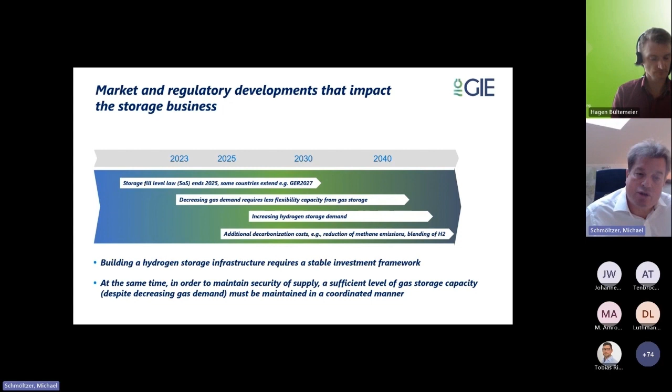So those are some developments we see in the coming years that also influence the question how to realize a hydrogen infrastructure, what is the investment framework, and that's a very difficult situation at the moment because the legal framework is not there, and the investments have to be taken now in the next years so that the demand for hydrogen storage can be covered.

When we look on the European, and I'm sure that we will see that also more from the German perspective, but when we look on the underground storage capacities on the European level, we have more than 1,000 terawatt hours storage capacity, working gas volume in depleted fields, aquifers, and salt caverns. So that are the storage capacities, which is around 25% of the gas demand in Europe.

When we look on the share of the salt caverns, so you see here on the left side a number of around 175 terawatt hours working gas volumes in salt caverns, which is a huge figure. And I think what is very interesting in context of Germany is that 80% of these European cavern capacities are located in Germany, which is a very important aspect also in context of repurposing existing sites. So Germany has a share of 80% of the European salt cavern capacities at the moment.

And because of the different energy content, different pressure situation, if you would convert all these existing cavern capacities, you would end up with a working gas volume for hydrogen of around 50 terawatt hours, because of the lower energy content and the different pressure situation. If we only look on the PCI list of planned cavern projects, we currently see till 2030 around 30 terawatt hours.

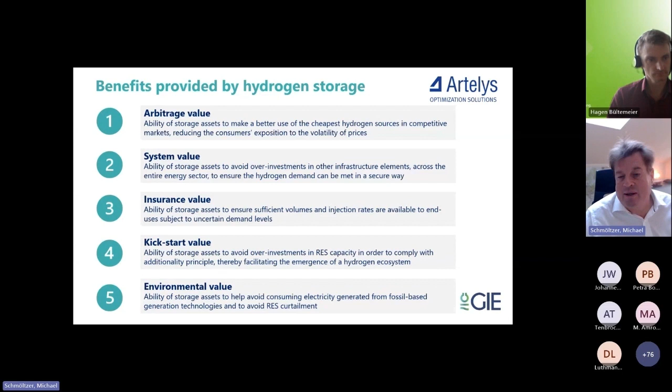a supply disruption. But what is quite new in the values for hydrogen storage is the kickstart value and the environmental value. So the kickstart value, hydrogen storages could also avoid overinvestments in the renewable electricity capacities, and the environmental value, we could avoid electricity generated from gas or fossil-based generation, and provide the flexibility that is needed in electrolyzers for producing green hydrogen.

And I think that are two additional values hydrogen storage are contributing to the value chain. If you are interested in all the activities and pilot projects on the European level, GIE, together with other organizations, ENTSOG has provided a hydrogen infrastructure map. You see here also the link where you can access the different projects. So it's on transmission, distribution, storage, where you can see all the pilot projects.

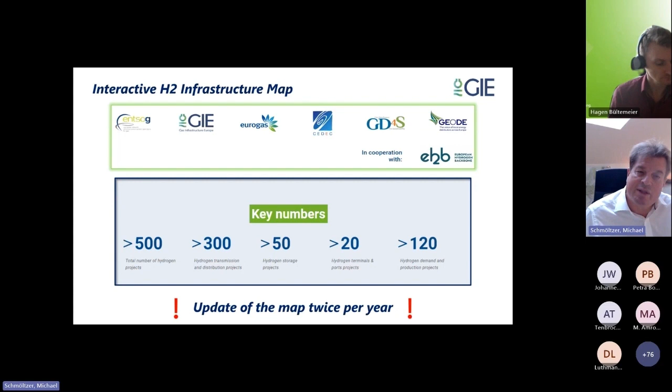At the moment, there are more than 500 hydrogen projects in Europe, which is a huge number. You see here the transmission projects, but you see also that we have more than 50 hydrogen storage projects, which are not only hydrogen cavern projects, but also porous rock projects, which is also quite a huge number. And I'm sure that we have in this session today also a good overview of what's going on in Germany. So that's quite interesting, and you find also the technical characteristics of these pilot projects on this infrastructure map.

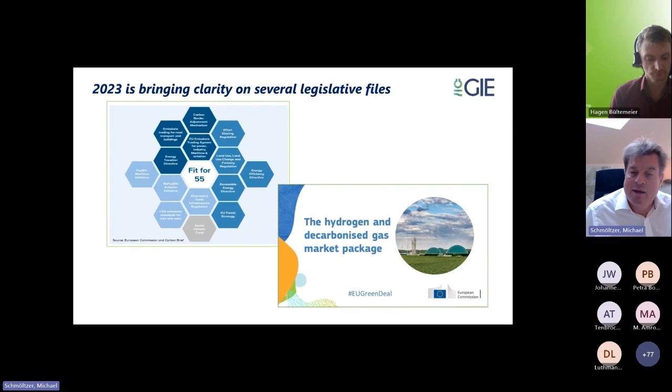I think what is also very important, and I mentioned that before, to take the investments, we need a regulatory and a legal framework for investing, for developing hydrogen infrastructure. So currently on the European level, there is a European hydrogen and decarbonized gas package under preparation. It's currently in the trilogue procedure. That means that the Parliament, the Commission and the Council have to find a compromise. So it's far advanced. But I think that legal framework is then the basis also to adapt the national legislation in Germany, the Energiewirtschaftsgesetz, which is very important in context of having a clear market environment, a market design to take the necessary investments.

And I think also the timing is essential. You have already seen that picture. So if we really want to meet the demand that is projected, we have to consider that for repurposing, we need between 3 and 5 years, depending on the project. For new investments, we are talking about more than 10 years. And to make that happen in 2030, you would have to take the investment decision in 24, 25. And that, I think, is the very important point to underline, that we need this legal and regulatory environment also to take the investment decision, so that the capacities can be prepared till 2030. I think that's my last point.

I think the main topics we see in the regulatory environment, when we talk about the European level, this legislative framework needs to respect different pathways, because you cannot compare the situation in Spain with Romania. I think that is something that the legal framework needs to consider. What is very important is to use the synergies between the existing gas and hydrogen infrastructure, especially in context of storage. We need the storages in the coming years for security of supply. On the other side, we want to repurpose existing storages into hydrogen, and that needs a coordinated transformation, considering also the declining gas demand and the flexibility need.

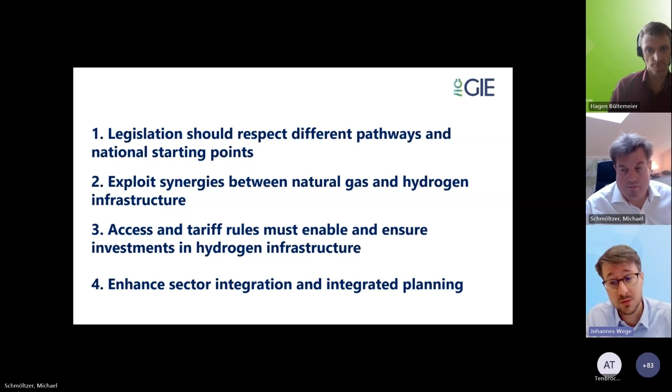Maybe not so far advanced as in northwest Germany and to the Dutch border. But this is, I think, something which I mentioned before. That's a little bit the problem at the moment, that this is not done in a very coordinated way. We have plans on the network,

but in a hydrogen network you also need the flexibility. Especially when you want to develop that in the most cost-efficient way and avoid over-investments, you have to look at where the flexibility need is, where the customers are, where the industrial customers are, and that I think has to be done in a more coordinated way, which is not the case at the moment.

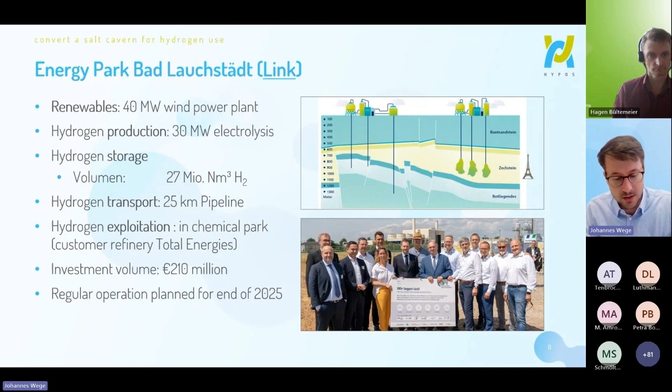And as I said, it was a 10-year journey to get here, and we have speakers that will now present every little aspect of what they did within the last 10 years to get to this point today. We will start with Hagen Bültemeier from the DBI Gas- und Umwelttechnik GmbH, and he will tell us what the design considerations of a hydrogen cavern in general mean, and how that all happened in the energy park I just mentioned. Hagen, please.

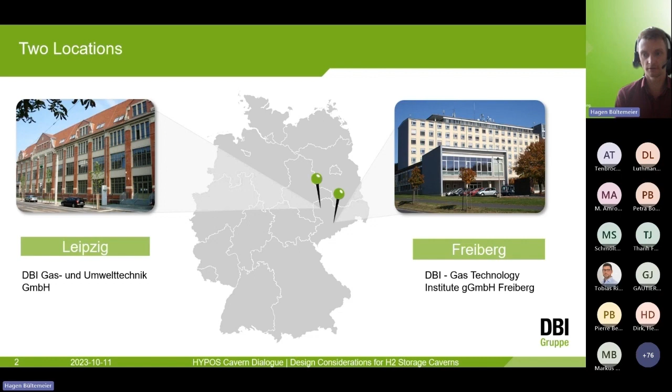Wege, thanks a lot for this kind introduction, and let's go for it. First of all, I'd like to give a quick introduction to our company as a whole. DBI Gas- und Umwelttechnik GmbH means loosely Gas and Environmental Technologies Limited. We are a small and medium-sized enterprise located at 2 locations in the state of Saxony in Germany, doing basically everything around engineering and consulting for gaseous energy supply. We also have a very strong foothold in research and development, in particular in the underground world, which is the department I'm the head of. In this department of gas production and gas storage, we are dealing with all the subsurface aspects.

We are not just only dealing with natural gas and hydrogen, but also have different other things in our portfolio, like the classical E&P business, geothermal energy, but the balance shifted very heavily towards the renewable side in the last years. And we consider the underground storages in this new renewable world just in the center of the energy supply, because they serve the purpose of balancing supply and demand.

And I think one very significant strength of our company is that we are able to consider the entire value chain. So we're not just dealing with subsurface, but also with pipeline transportation, the production side, whether it's natural gas from deposits, reservoirs, or hydrogen from sources like electrolysis or others. And then we can also think about the utilization of our gaseous products and the related quality demands.

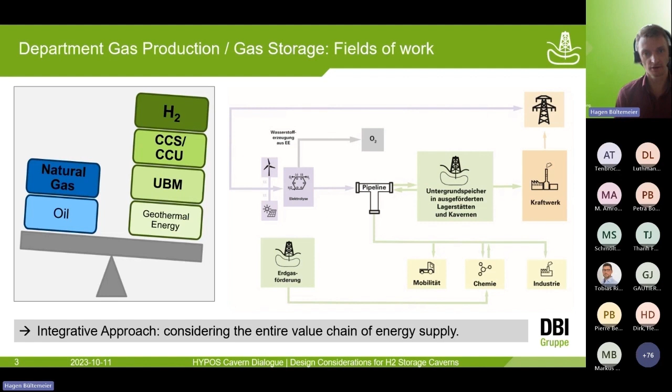Okay, but now let's get into the actual presentation. And I want to cover the storage capacities when it comes to hydrogen storage, the pressure development in caverns and wells, stress evaluation, what does it mean for cavern completions or completion of wellbores, and last but not least, talk about H2 purity requirements. Okay, storage capacities, first part.

Mr. Schmölzer has given you the general picture for Europe. I would like to zoom in a bit more on the German side here, which provides the largest storage capacities in the European Union at 46 sites. Contrary to Europe as a whole, the majority of storage capacities in Germany are in caverns, because Germany has the advantage of having those very vast salt bodies, in particular in the northern part, where you also see all of those little dots in this figure on the right-hand side.

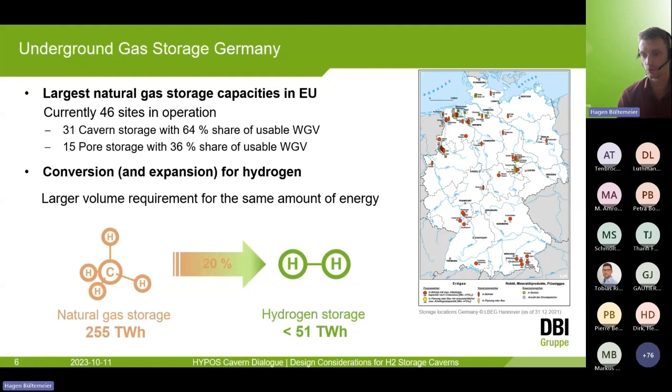So in the currently existing natural gas world, we have a storage capacity of approximately 255 terawatt hours. If we would convert all of the currently existing storages, caverns and pores, we would end up with only 51 terawatt hours of hydrogen storage. And let's come to the next slide to answer the question, why is that? Why do we have such a significant difference between hydrogen and natural gas storage capacity in terms of energy?

First of all, when we design a cavern, we need to know how much storage capacity we actually want. And this brings us to the geological conditions, the depths of our cavern, and the related pressure and temperature. As a starting point here, we can use the simple general gas equation, including Z factor, of course, as a component property. And we need to know our cavern temperature and our cavern pressures, which are determined by stress tests in laboratory, and they are more or less deriving from the depths of the cavern itself. And then we can convert our cavern volume to the storage volume in norm cubic meters, or vice versa.

When we make this calculation with our maximum pressure, we are getting our total gas volume. If we do this calculation for our minimum pressure, we are getting our cushion gas volume. And the difference between the two is our actual working gas volume, WGV, the number with which we can actually work, and which is our storage capacity.

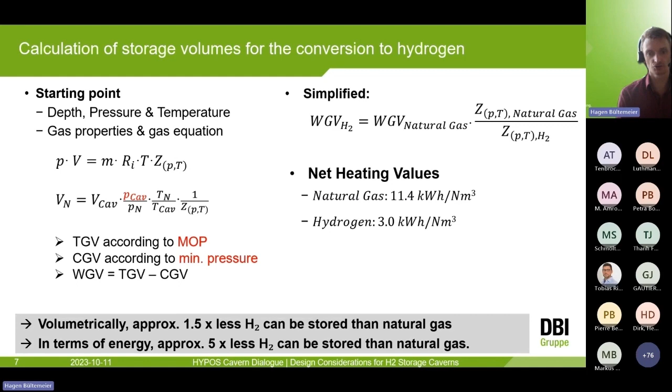And the second aspect is, of course, the energy behind that. Each volume of natural gas has a higher heating value than the respective volume of hydrogen, and this brings us to the vast difference in energy. As a rule of thumb, you can remember that volumetrically, under the same storage conditions, pressure, temperature, volume of the cavern, you store approximately 1.5 times less hydrogen compared to natural gas. And when it comes to energy, 5 times less hydrogen than natural gas under the same conditions. Okay, to put this into perspective, again, some numbers for Germany.

The Federal Ministry for Economics and Climate published their so-called long-term scenarios, currently already in the third version, which sums up 3 different scenarios for the development of the storage capacities for hydrogen. And depending on scenario, we are looking at required storage capacities of hydrogen between 47 and 73 terawatt hours. Again, numbers for Germany, by 2045.

And this brings us to the very simple bottom line. Our energy transition requires additional hydrogen underground storage facilities. And in the same way, you can make such calculations for Europe as a whole, of course.

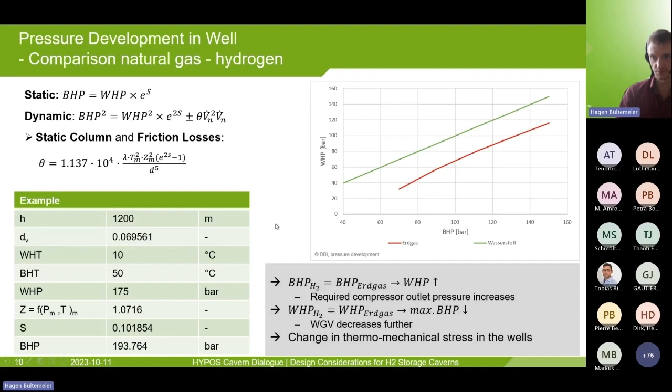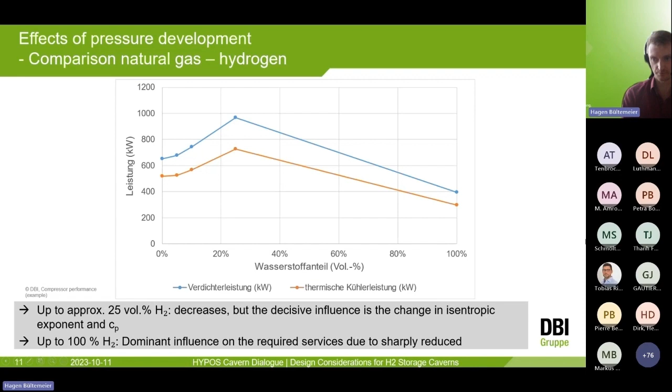Stress evaluation in the well, also arising from a different pressure situation. We have basically two different systems there. We have our tubing of our well with our annulus and then our last cemented casing. And we have our system of, let's say, the outside: the casing, the cement, and the surrounding rock. Stress could be either isotropic or anisotropic, and we have then our different inner and outer loads, and also different inner temperatures and formation temperatures from the outside.

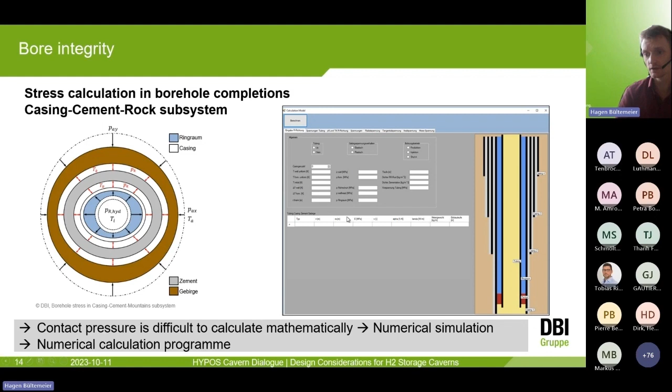And then with the different loads that we have from the stress and the strengths of our cement and the formation pressure from our surrounding rock formation, we can calculate the stresses in the wellbore, which is a 3D numerical simulation. All of those different equations are behind it: radial stresses, tangential stresses, axial stresses, all combined into this equivalent stress calculation according to von Mises.

And then we need to see where we end up with our safety factor. Our actual resulting stress divided by our equivalent stress should still provide us a certain safety. A factor of 1.25 is common in the gas storage world, which you can also find in various existing rules.

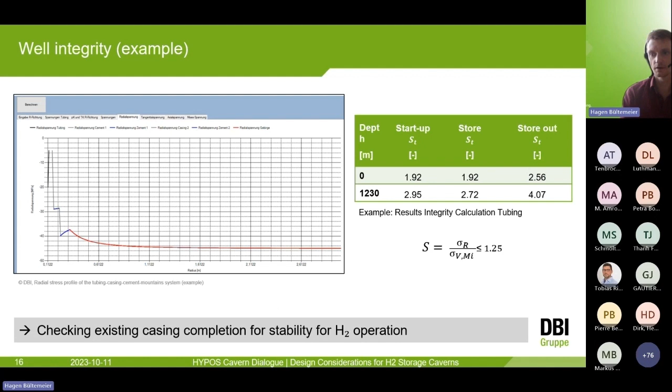Here are just some examples depicting how stress develops from the zero axis of the wellbore further into the rock. These calculations you have to do for natural gas, but you have to redo them for the hydrogen system as well. And this brings us now to our wellbore completion schemes, and you will hear more in depth about that later on as well.

But for this general picture, when we are talking about a wellbore completion, we are always talking about two barrier systems, a primary and a secondary barrier, which serve the purpose to control our gas flux, respectively our shut-in. The primary barrier is directly in contact with our storage medium, here marked blue, and it shall prevent uncontrolled influx of our stored gas into our well, unless we want that to happen when we withdraw or inject.

In case our primary barrier fails, we still have a secondary barrier that acts as a backup and shall provide tightness and safety in case the primary barrier is not working or fails. If the primary barrier fails, we still have tightness and safety, and it gives us the required window of time to do a workover of our well.

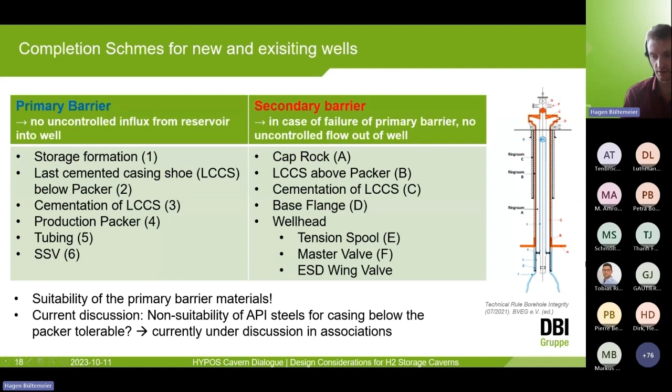You also see here that below our production packer, our last cemented casing is the only barrier, and this part of the last cemented casing is also in contact with hydrogen, but the last cemented casing is difficult to replace, and I will come back to that in the next slide.

When we talk about cavern completions, we would also go in the hydrogen world for a classical gas completion with a production packer and an SSV, but just using hydrogen-ready materials, and we are dimensioning it according to our required flow rates and whatnot.

However, if we have an existing well, we would still need to deal with the question, what if our last cemented casing shoe would not be fit for the hydrogen world, since it would be in contact with hydrogen? Here we could find a quick workaround by protecting the existing last cemented casing shoe with a new protective inner liner, but then again it would reduce our tubing diameter, and this could result in lower flow rates that can be provided.

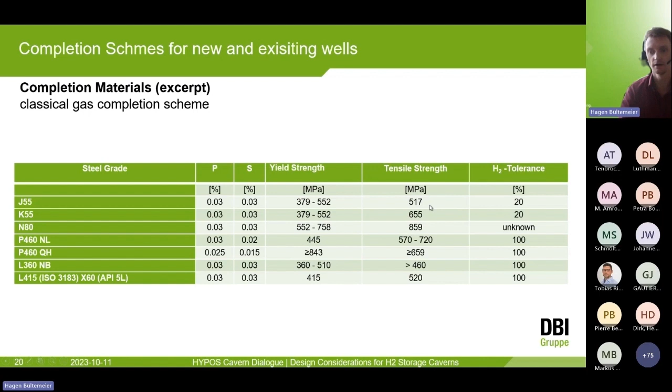This slide, the presentations will be shared with you in the aftermath anyway, and here I just compiled various steel grades from API and also other norms with their respective yield strengths, tensile strengths, and H2 tolerances, so that you can double check for yourself what could be a suitable replacement for what you actually have installed right now.

And this brings us to the last part, H2 purity requirements. In the last presentations, you will hear very detailed information about that. But when we have a cavern, we also inevitably have a cavern sump. When we build new caverns, normally we don't have any carbon sources or microbiology in those salt formations. However, they could still be brought in due to the leaching water. And the system is always difficult when carbon sources get into the mix as well.

Yes? You have 3 minutes left. That's okay. Thanks. Fits.

And when we are converting caverns previously used for natural gas, we need to deal with the issue of whether we still have remaining hydrocarbons in there. Was a heavy oil blanket like diesel previously used? This could be a possible hydrocarbon source. And then we could have various processes going on, most dangerous, of course, the formation of H2S. And those processes could be triggered by microbial activity.

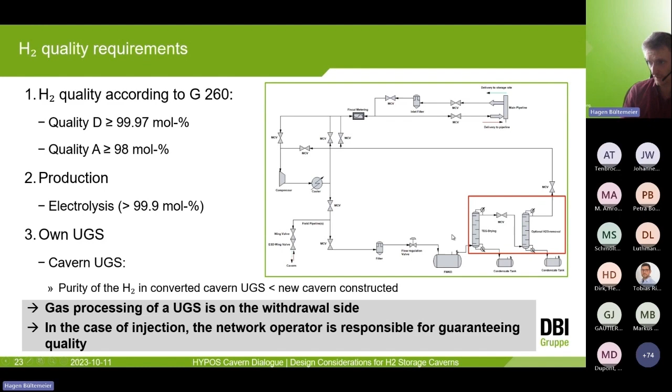In the end, whatever happens in our cavern, at the withdrawal side we would need to deal with the gas treatment. In general, there are different quality requirements in current discussion, grades varying from quality grade A to quality grade D, which have a pretty significant difference in terms of quality. And this brings us to the treatment means necessary.

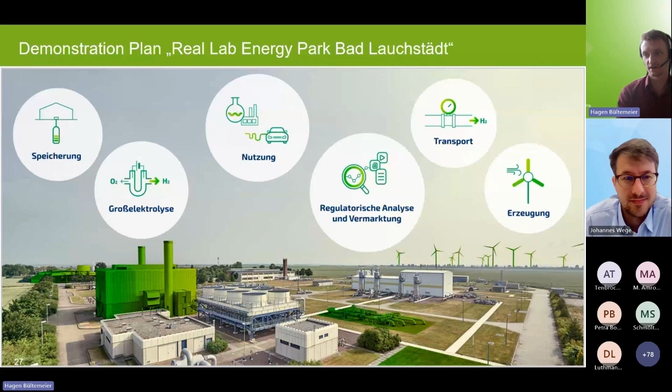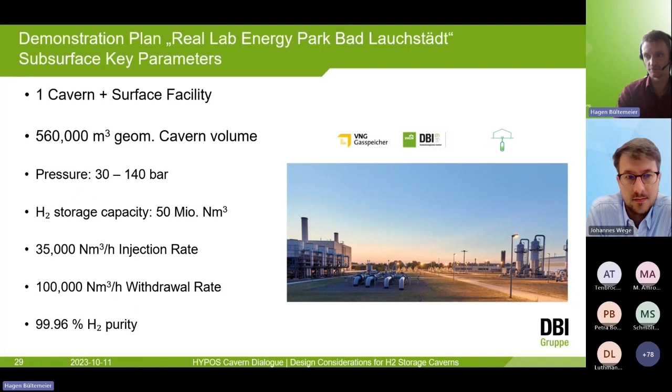Okay, with that being said, I'm done. I think it was quite a fast ride through the entire hydrogen underground storage world as an overview.

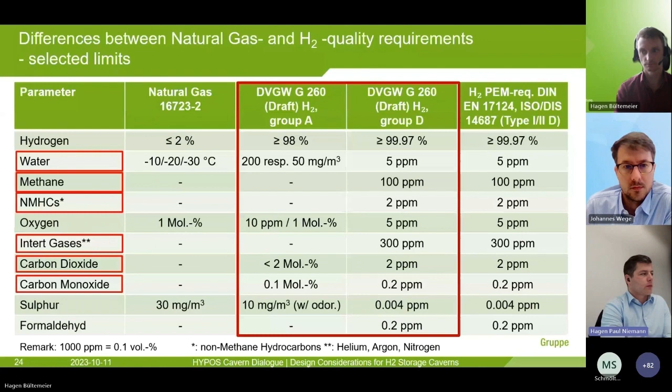Yes, my name is Frank Schweizer. I'm the group manager of the group Lifetime Concepts for Hydrogen Applications at the Fraunhofer Institute for the Mechanics of Materials. Let me just show you 2 slides about this institute. But today I'm talking about the mechanical integrity of the hydrogen infrastructure. Mr. Bültemeier already showed some slides about the components we regarded in the project HYPOS H2 UGS, underground storage. That's the short version, and I show it in the next slides.

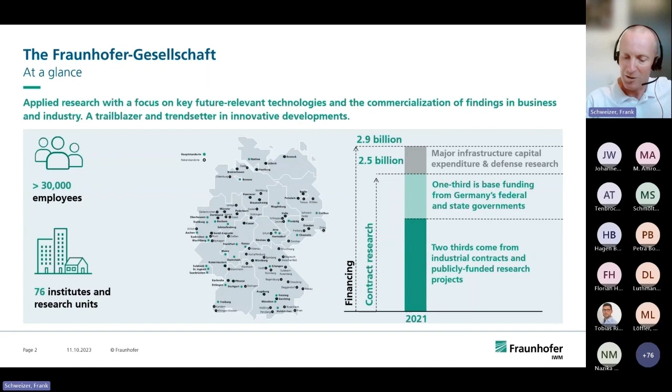Fraunhofer IWM itself, as I said, is located in the southwest. We are about 330 employees, and we have an operating budget of about 25 million euro. In 2022, we had industrial revenues of 25%. This is quite low because of the COVID situation. Normally, we are at about 40% industrial revenues.

So the motivation in underground storage systems, and especially in the project HYPOS H2 UGS, is, as Mr. Bültemeier said, that the material properties for the storage of hydrocarbons and other media were successfully applied for decades. Now we want to switch to hydrogen, and hydrogen can change the properties, especially of the steel materials. Mr. Bültemeier showed the packer system.

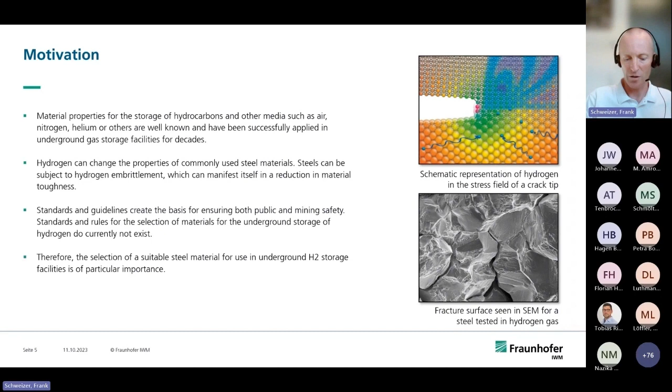In the consortium we selected the pipeline steel X56 to evaluate, and we characterized it by basic characterizations for steels. We did weld inspections, sour gas testing, notch impact testing, slow strain rate tensile testing, and we also looked at the fatigue behavior, because you have the hydrogen coming in, so you have pressure inside the tubes, and the hydrogen coming out with the release of pressure. So you have cyclic deformation on the steel tubes.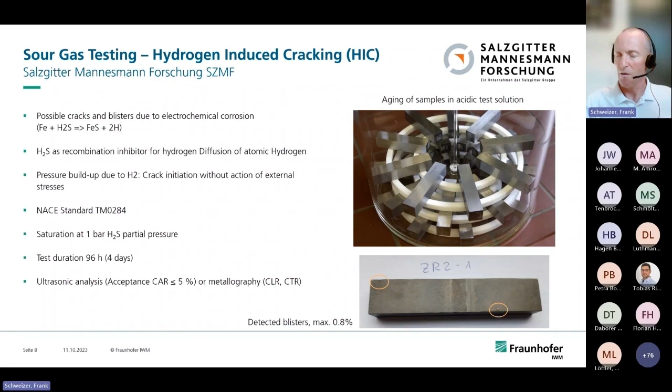You can also take out samples like this and put them under stress, for example by a 4-point bending machine, also in 1 bar H2S partial pressure, for the same duration or an extended duration of about 30 days. Then you do an optical evaluation or magnetic particle testing to see if cracks are building up in the materials. For the X56 ferritic steel we investigated, there were no cracks registered in the base metal and the weld metal for all welds we had. So this was also very good for us.

Then with the component, you come in contact with hydrogen gas for sure, because we fill that into the caverns. You have different possibilities to test that. You can pre-charge your steel samples with hydrogen and test them.

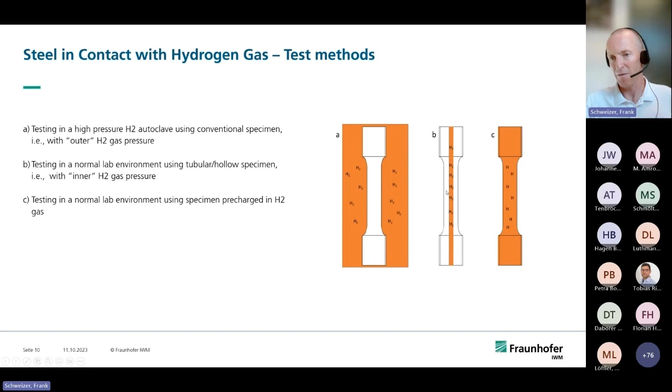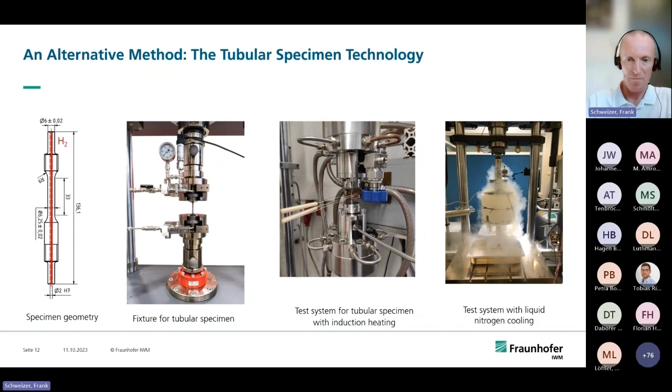Also in the project, we used that to measure the fatigue properties, which is not so easy in these autoclave systems. So also you see here stress strain curves with the hollow samples. You also see the reduction by 100 bar hydrogen, and you can also have a look on the fracture surfaces, and you see a change from ambient air with a ductile behavior to a more pronounced fracture surface with hydrogen.

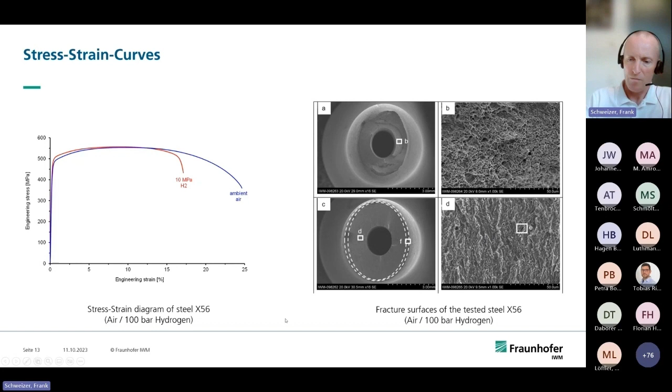So as I said, the main thing is these inner bore samples. They are quite good not only for straining the material, but to do cyclic testing. We especially look here at low cycle fatigue because we don't have very many cycles in the caverns or in the steels for the caverns. And the main advantage is really that you have a very closed system. With a normal autoclave system, there's always the problem that you get single molecules of oxygen inside of the system, and this alters the outcome of the experiments a lot.

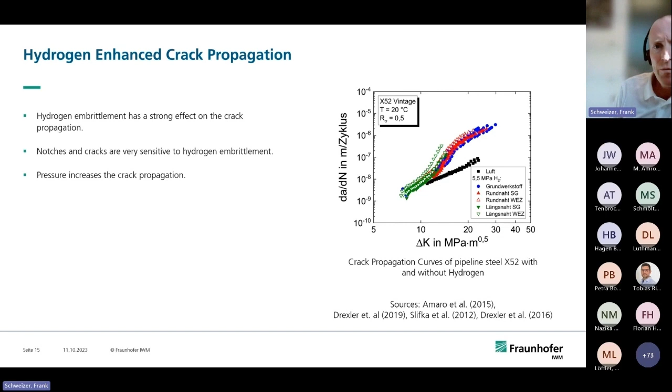And also what you see here, blue is sound material, red is the circumferential weld, and green is a longitudinal weld. But this is not our measurement. This is from literature, but it shows it quite well. And you see that the sound material and at least the circumferential welds behave quite the same. This is quite different to other experiments, but for the crack propagation, this is an important outcome.

So we also did additional tests in the HYPOS UGS project. We did Charpy tests with preloaded samples, but we were not so satisfied with the results. I think there has to be more work done on that. The main problem with ferritic steels is that the hydrogen gasses out in short times.

And also, we measured the critical stress intensity, but for the X56 steel, we could just say the steel is too ductile for this type of measurement. And this is good for the caverns. This means you don't have a real critical stress intensity or an enhanced stress intensity with hydrogen. But you cannot really show this, because if you use the standards, it's not inside of the standards.

So the main outcome of the project was that for the investigated X56 steel tube, the main influence really appears to be the hydrogen sulfide. So we always have to look for the H2S content. If you have only pure hydrogen and no H2S, a minor effect is expected when the pipe is operated below the yield strength. Above yield strength, you get micro cracks, and as I showed, the hydrogen will pronounce the crack propagation.

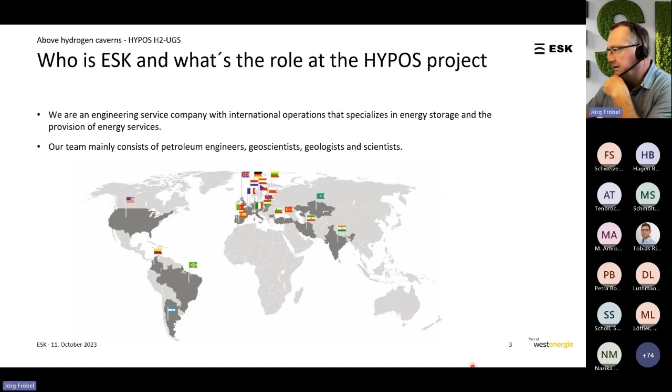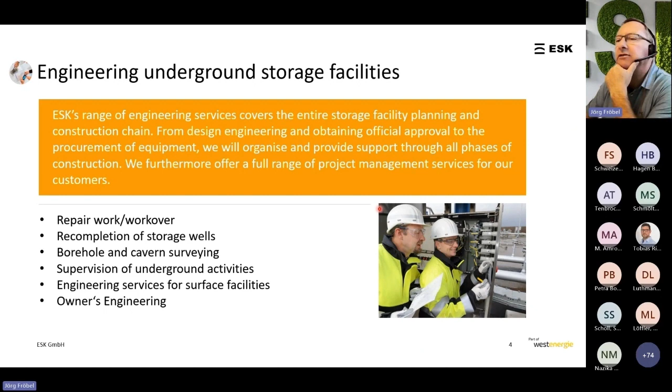The following charts shall only give a rough overview, and you can read them if the presentation is available for all. We do engineering of underground storage facilities, and from repair to owner's engineering, we provide services.

We have software products; the newest, maybe it's known, is Boris Cloud for well integrity studies as subsurface matters. We also have CavPool and PoreTech, a thermodynamic simulator for gas caverns and material balance for porous rock, like aquifers. Also consulting services and surveys: conceptual studies, due diligence reports, and so on.

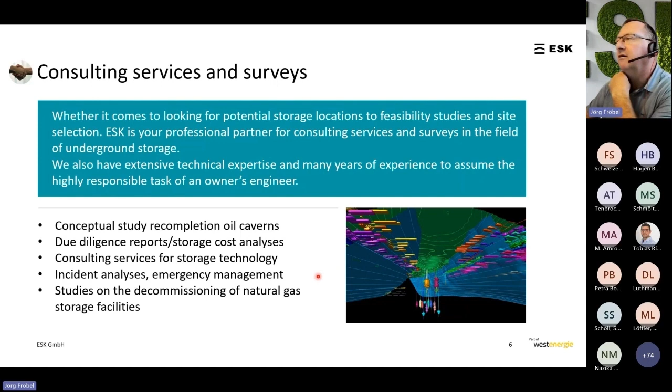We also deal with the decommissioning of natural gas storage facilities, surface and subsurface. We did it from the engineering until now for the storage in Buchholz; today the last activities are taking place.

In research and development, first of all HYPOS, H2 UGS, but we were also involved in Adele, an R&D project for compressed air storage and adiabatic air storage. Also conversion of natural gas to hydrogen storages. An interesting part is the connection to electrical power storage or electrical themes like redispatch or sector coupling. This only as a short overview.

We also have a branch near Dortmund, and they deal with the conversion of the gas grids from L quality to H quality. For the future, they are now also beginning with hydrogen works. The first little hydrogen network was in operation there. But this is for literature.

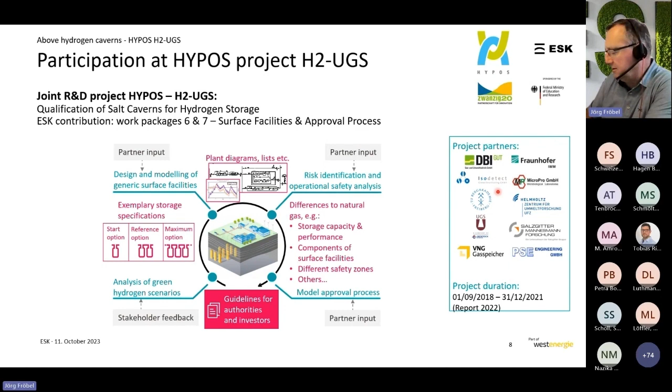Okay, our participation in the HYPOS hydrogen project. We did the design and modeling of surface facilities, the risk identification with operational safety analysis, the analysis of green hydrogen scenarios, and a model approval process in direction to authorities. We did it with input and interfaces with our project partners. These are some bullet points of our content of work.

First we had to research market requirements: working gas, maximum rates, typical cycle lengths for storage, purity requirements, and so on. We made a basic design for surface facilities with respect to these market options, component specifications and description of components of the surface facilities. Then we did simulations of the designed variants of the plant.

In the other work package we dealt with the identification of hydrogen-specific risks, evaluation of these potentials and causalities, and recommendations for risk prevention. We developed exemplary operational control and surveillance regimes, and in line with the authority, we outlined an exemplary approval process. The aim for all involved companies in the H2 UGS project was the development of a general guideline.

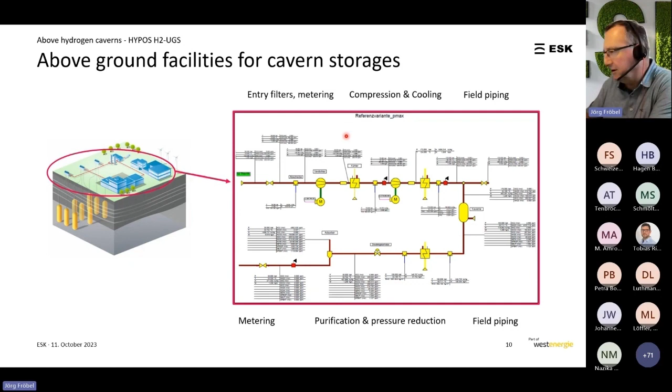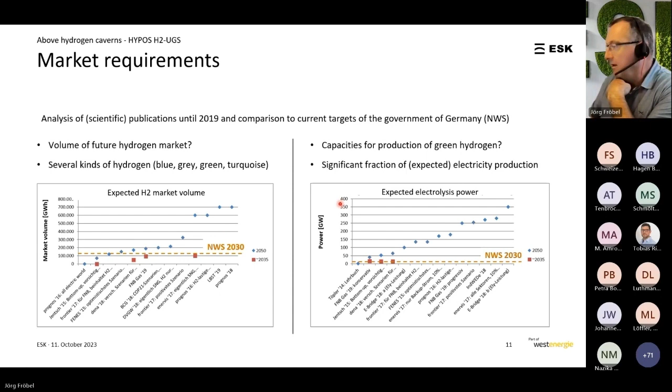Yes, the storage works almost according to a load curve, and we developed three different storage variants with load curves. So we had the start, reference and maximum variants, and the load curve is a weekly curve for the start variant, and a yearly curve for the reference and maximum.

And so we also did several simulation runs with our software tool, CAVT, with variation of pressure, temperature, and flow. So, a lot of simulation to get an idea of the pressure line of the cavern around the year or around the week.

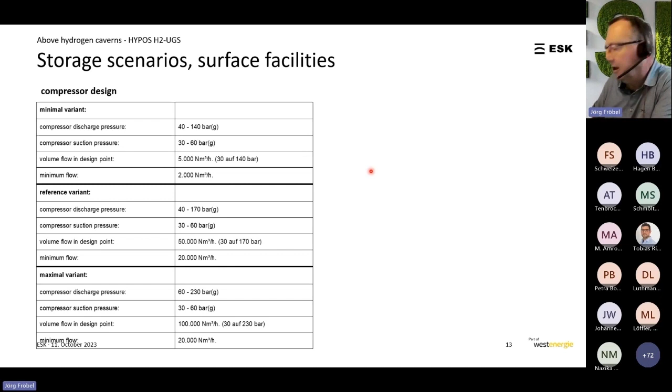So we have to think about other options, maybe a turbo type, but this is then the detail engineering task, and in this project, we only made a first rough assumption of this.

You have to remove dust, droplets or water, and if there is some oxygen, you also have to remove the oxygen by catalytic deoxidation if necessary. So you have to have a cooling and also a droplet separator. Then you have a header for switching to the flow measuring devices for fiscal metering or contractual matters.

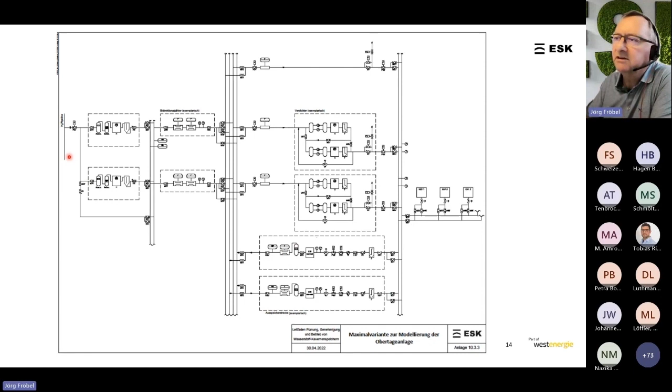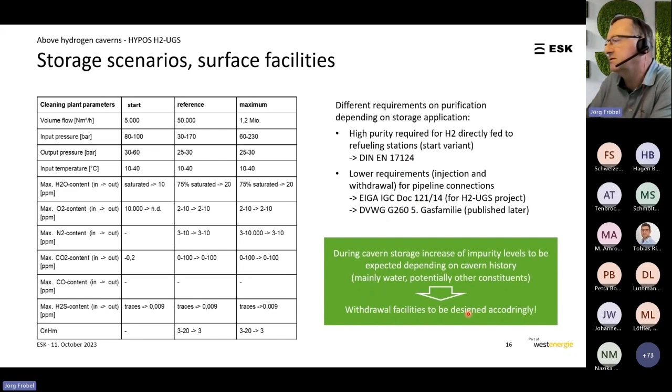You have flammability and molecular properties you have to consider. The heat capacity is different, so it has a different pressure response if you have a heat input into a shut-in volume. And the advantage of hydrogen: you have no hydrate formation, in contrast to natural gas. So the tool sets for safety we can use from natural gas, but we have to consider the differences,

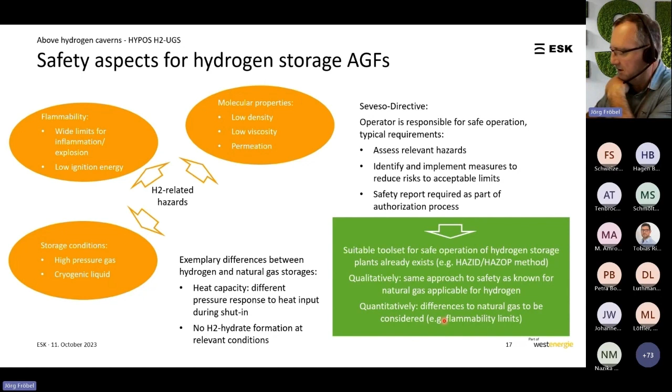And this is just now under construction. There is a draft for the equality of hydrogen to natural gas under work. So I think I have it.

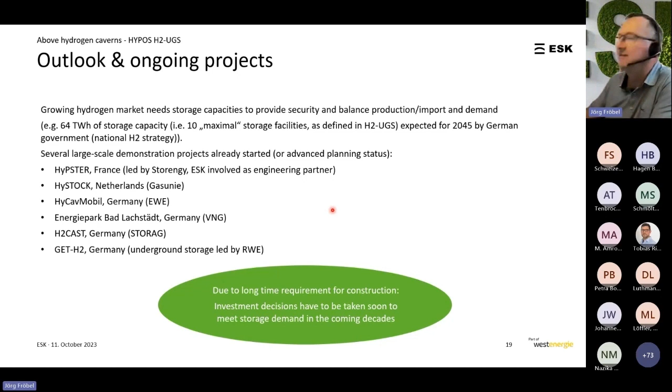Outlook and ongoing projects. You see here some named projects in several countries which are ongoing. In some we are involved, some are the stakeholders of the projects. We are also involved in ongoing projects, but we have confidentiality agreements, so I can't show them here. So I hope it wasn't too fast at the end.

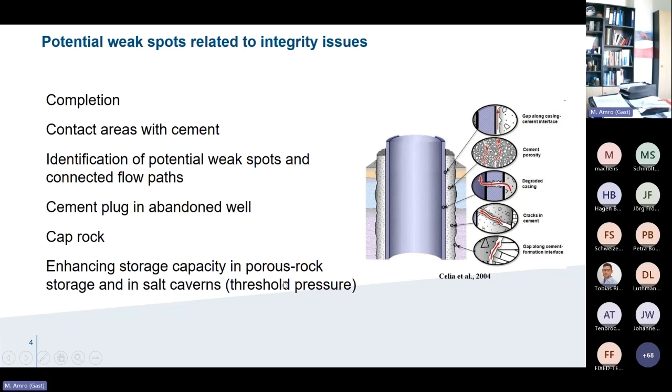And we have to enhance the storage capacity. This is an economical issue. How to enhance storage capacity of a storage location? We have to consider the threshold pressure of the caprock, mainly. Threshold pressure, this is a very important point. So we can investigate such points or such issues in our institute.

And this casing shoe, this point, is exposed to high pressure, and there is a link between cement and casing at this point, and cement and formation. Yeah. And we have to consider all these materials exposed to the gas, in this case hydrogen. Yeah?

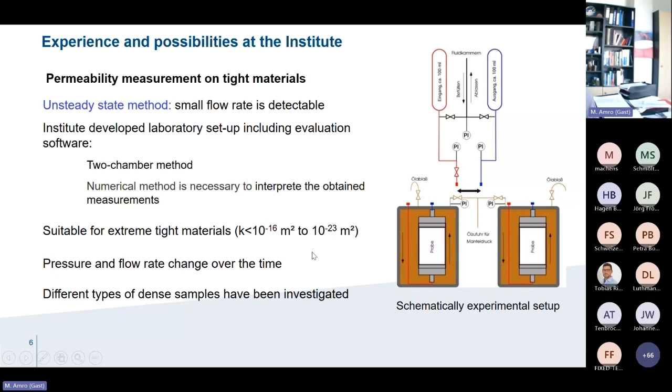We have a suitable analytical and numerical method we have developed in our institute to identify the permeability. We can identify a permeability down to 10^-23 square meters, which is lower than a nanodarcy. So the pressure and flow rate change over time can be recorded, and we can use different types of samples, not only salt. We can use, of course, cement and so on. And we investigated a lot of samples, mainly for European countries.

But also we can consider composite samples, that means cement and casing. In this case it is coil tubing because it's a small sample, related to this equipment. But we can use also real casing samples, and we can go up to 300 millimeters in diameter. Oh, I don't have a sample here, it's too heavy, I cannot show.

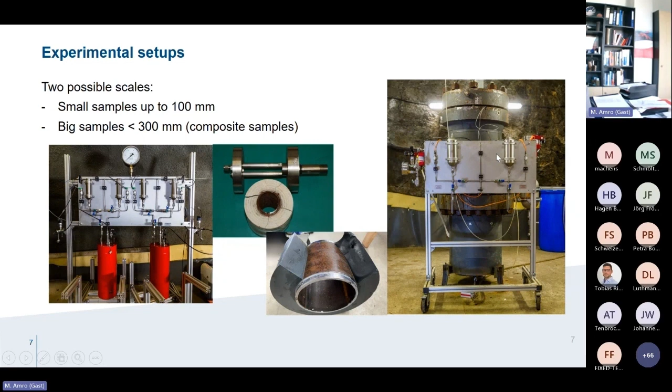Anyway, and we can use a reactor. Here is a big scale reactor, and we have the same system. So we can vary any parameters you wish. For example, you give us the pressure, confining pressure, or the depth of the caverns, the gas you will consider, and so on, and the samples.

So that means we can evaluate the tightness of the sample, and we can also make recommendations to deal with the system if leakage has been detected or something like that, based on our measurements and based on the equipment.

Now I will move to another topic, which is carbon dioxide as a cushion gas. We investigated this topic, but this was a small project first, and in the project we had to study the steady state or stationary conditions. That means we consider CO2 in the bottom of the salt caverns, hydrogen at the top, and we had to investigate the mixture of both gases at a certain depth without injection or movement or something like that.

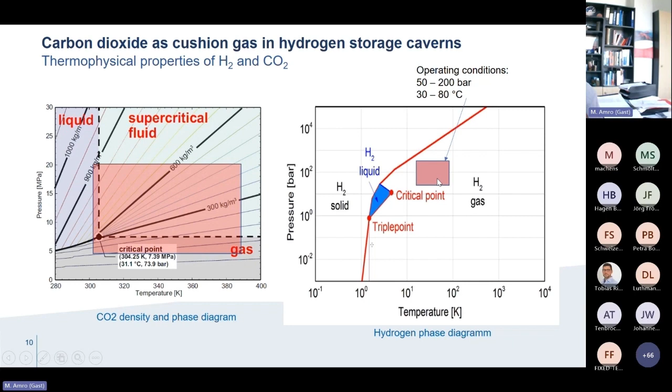So if we consider both gases, CO2 here and hydrogen, and the phase diagram, you will find a lot of differences between both gases. Here, for example, within this range of operation conditions, you will have CO2 in all different states, depending on the pressure and temperature, of course. We can have it as gas, liquid, and supercritical. While hydrogen will have the same state, which is gas. This is important.

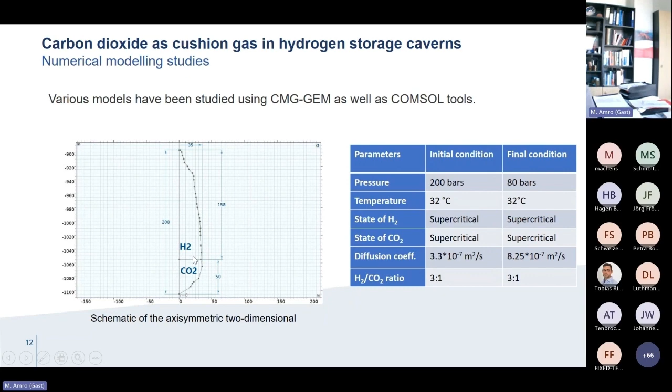Okay, good. What we have done, we have simulated, that means we investigated the mixing issues between CO2 and hydrogen based on the software CMG. Here again are the conditions. We consider that the interface between CO2 and hydrogen is at this depth. So we consider the real cavern. The CO2 is in the bottom, hydrogen is in the top. And we investigated the mixing areas in the area of the interface.

But 1,000 days we don't have. So we have to consider maybe 200 days or something like that. In that time, the mixing zone will be around maybe 5 meters. But please don't forget, these are static conditions. Now, this was done at a pressure of 200 bar. If we decrease the pressure to 80 bars, the mixing zone will increase.

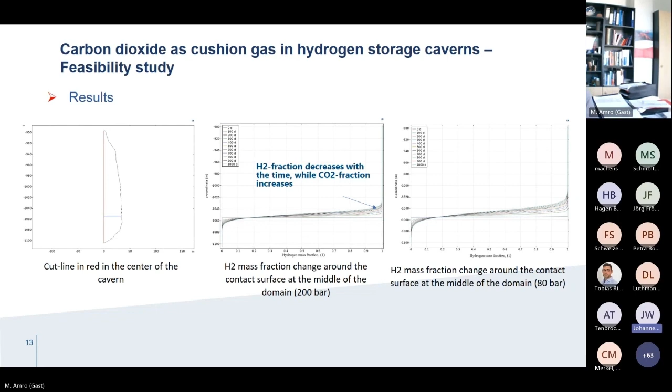This is again the illustration of the same thing which I showed you: 0, 100, 500, and 1,000 days at 200 bars, and you can see the mixing zone, and this is at 80 bars.

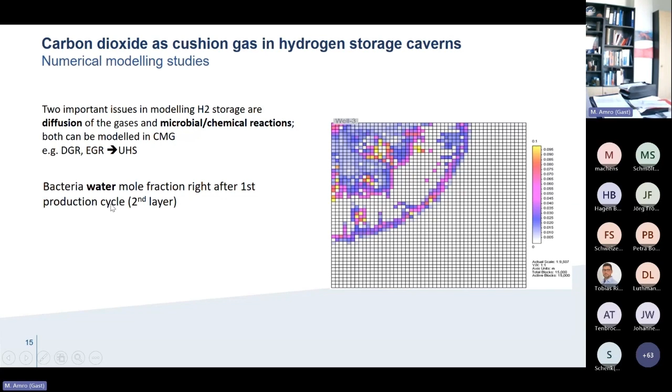We also did a CMG simulation for a reservoir for the diffusion between CO2 and hydrogen, and we also considered the microbial and chemical reactions in the porous media. In this case there was no project; we assumed a depleted gas reservoir. Then we applied enhanced gas recovery, and then we switched to underground hydrogen storage. And we investigated the growth of microorganisms within the porous media. That means we are able, with our infrastructure, to study such issues.

So anyway, I will conclude. CO2 has been investigated as a cushion gas. I will not go over the integrity issues because I mentioned all the factors.

CO2 can be used as a cushion gas under static conditions. I mean, we have investigated that, and we are sure that CO2 can be used as a cushion gas in hydrogen storage. The phase behavior is very important. We can model it by CMG. The economic feasibility using CO2 as a cushion gas, especially in porous media, is very important because at the end of the day, you will have finally a CO2 storage location.

That means if you stop using hydrogen or something like that, the chemical and microbiological reactions can also be modeled. In the case of higher uncertainties, we have to consider a lot of parameters and we have to do a lot of investigations to consider all uncertainties and to study the effect of them.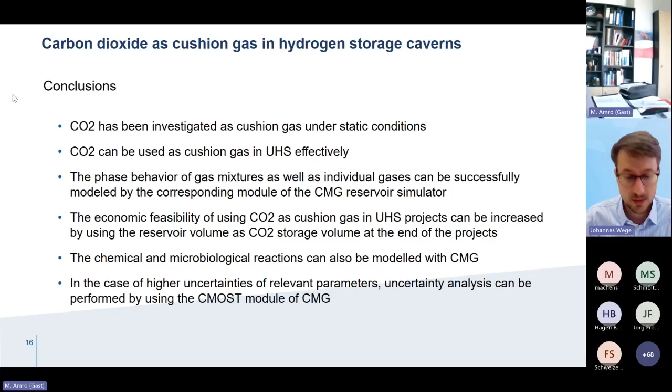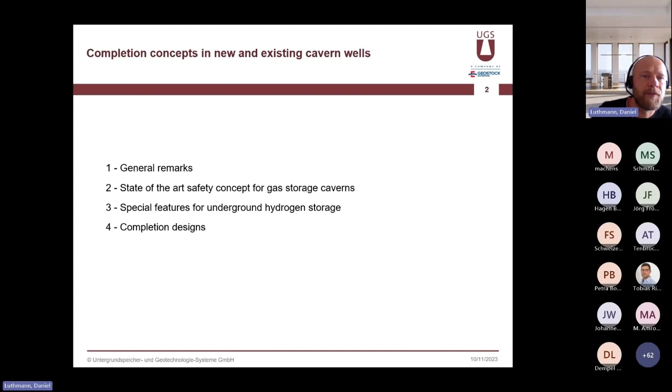All right. Okay. So welcome to a quick run through possible completion designs for hydrogen caverns. At this point, I will only go superficially through the topic, but I hope everyone can follow me as well. To introduce myself, my name is Daniel Luthmann. Currently, I'm the head of the Department for Cavern Completion and Testing at UGS, and I've been working for 14 years at UGS. Okay, let's get right into the topic. In terms of order, I will go into the current status again, then move into special requirements for hydrogen, and conclude with possible completion designs.

Well, in general, we have a wide range of cavern sizes, depths, and shapes, and depending on this, the pressure, temperature, and flow rates also vary. In principle, there's a large amount of practical experience in the industry in dealing with oil and gas storages. The planning processes and design principles are also very well known. The caverns in particular have practical advantages as a storage for hydrogen. Hydrogen does not react with the salt as surrounding rock. It can be stored and retrieved at short notice, and provided you have a cavern filled with brine, a partial fill would also be possible.

However, there are also challenges to overcome. Unfortunately, there is no or very little experience about the reactivity of hydrogen with the materials used in the well. For example, the metals, cement, or the elastomers from downhole equipment. Furthermore, the history of the cavern must be taken into account when using the cavern as a hydrogen storage to avoid negative influences. For example, during the leaching process, wastewater has been used. Okay.

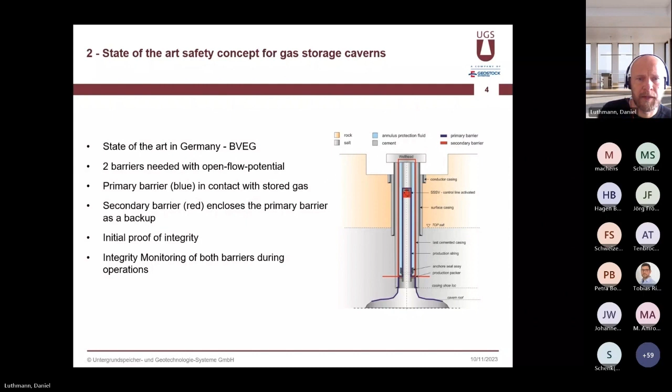Well, if you look at the barriers, we quickly arrive at the resistance to the storage medium. Compared to natural gas and oil, hydrogen demands special requirements of the material. In case of steel, attention must be paid to the chemical composition with a fine-grained structure; with regard to embrittlement, tensile strength and hardness must also be limited. Furthermore, a minimum notched impact strength must be applied.

A material approval for an API J55 is available in principle, but in this context, it must be said again that the specification of the API for a J55 is not sufficient. The effect of hydrogen on steel was explained in more detail in the presentation by the Fraunhofer Institute, so I keep it here short. And further material approvals are in progress right now.

The verification of the suitability of the elastomers and the cement is still outstanding. However, there are cement suppliers who have tested the cement in the laboratory and are also promoting it. In general, with regard to the casings to be installed, welding is preferred to a threaded connection.

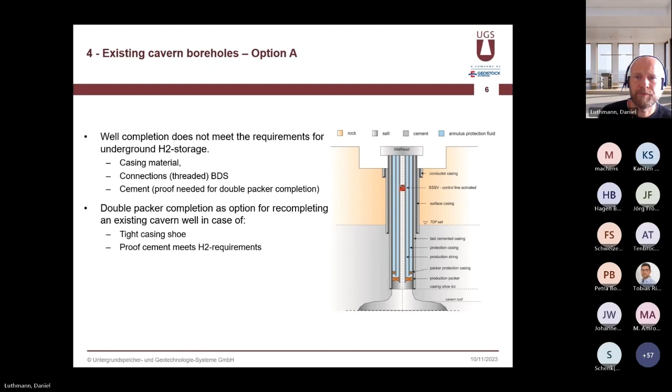Well, finally, the selection of the completion design depends on the general conditions such as measurements, test results, whatever you can find for the old well.

For new caverns to be completed, the completion design can be based on the current standard for gas caverns, which means you use a combination of packer, production string, and safety valve. The individual components are then to be adapted to the special requirements for hydrogen, which brings us back to the challenges mentioned above, the material selection for steel, elastomer, and so on. And here the standards and certifications are still missing. So the basic design isn't different from a natural gas completion, and it's finally more a question of the material selection. So that was a real quick run.

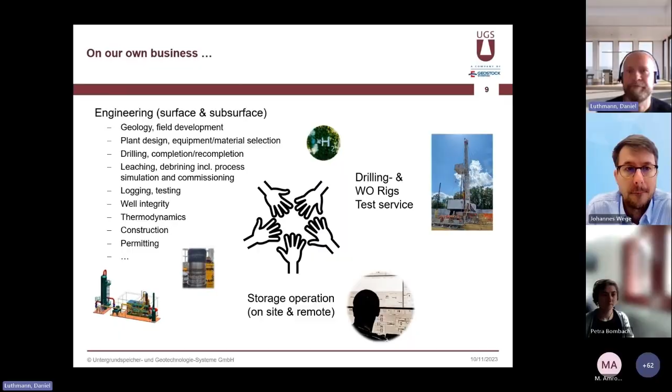Today, I think you, Petra, are a biologist, and we are happy to hear why biologists also deal with salt caverns. Yeah, we can see your slides. Yeah, you can start.

Okay, thank you very much. I welcome everybody to my presentation. My name is Petra Bombach and I'm scientific assistant at the Isodetect company, and today Martin Wagner from the MicroPro company and I want to give you a presentation about the microbial impact on hydrogen storage in salt caverns.

So let me briefly introduce the Isodetect company. We were founded in 2004, and we are a spin-off company of the Helmholtz Center for Environmental Research in Leipzig and of the Helmholtz Center in Munich. We provide microbial examinations and compound-specific stable isotope analysis to elucidate the biological and also geochemical processes in underground gas reservoirs and at contaminated sites.

Why investigate microbial processes in salt caverns? Hydrogen is an excellent chemical energy carrier, but it's also an attractive energy source for a lot of microbes living in salt caverns. In general, there are four different processes known by which microbes can consume the hydrogen.

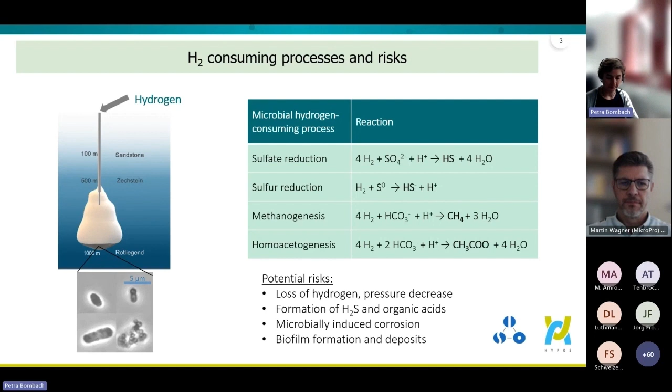So in order to ensure an efficient and economically successful underground hydrogen storage, the microbial impact on the hydrogen storage should be investigated. This was done in the HYPOS project H2 UGS, as already mentioned before. Within this project, the microbial analysis was performed in close collaboration of the Isodetect company, the MicroPro company, and the Helmholtz Centre for Environmental Research.

All the results and methods are well documented in a guideline, which you can download from the webpage. I have to mention that the guideline is only available in German. In the next slides, I will explain methods to assess the microbial aspects of hydrogen storage and show you the most important results of this research project.

If you are in the planning phase of a salt cavern hydrogen storage, there are different relevant parameters and methods to assess the microbial risk. First, I always recommend performing hydrochemical analysis. Microbial activities are influenced by the hydrochemical conditions present in the salt cavern. All microbes require for their growth an energy source, which can be hydrogen, and an electron acceptor for energy generation, which can be, for example, sulfate.

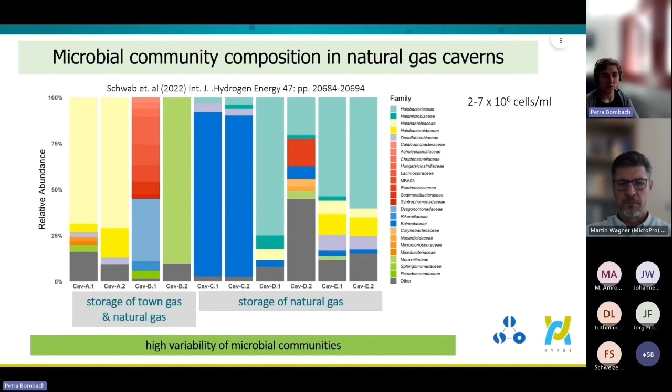So next, we wanted to know if these microbes also consume the hydrogen. This was done in laboratory studies; Martin Wagner will explain this later. Maybe one sentence on this: we could see that the hydrogen is consumed by some of these microbial communities. According to these results, we were looking for tools for how we can later, during underground hydrogen storage, monitor these microbial hydrogen-consuming processes.

If we have a look at the biologically relevant molecules, which are hydrogen, carbon dioxide, sulfate, and methane, all of these molecules consist of the elements carbon, hydrogen, oxygen, or sulfur. You find these elements in nature in different stable isotopes. For example, carbon has two different stable isotopes: one with a mass of 12, the light isotope, with an abundance in nature of 98.9%, and the heavy isotope with a mass of 13, with an abundance of 1.1%.

This isotope ratio, the ratio of the heavy to the light isotope, can be measured by an instrument called gas chromatography isotope ratio mass spectrometry. You don't measure the total ratio of heavy to light isotope in a sample, but always this ratio of the sample compared to that of an international standard. All these isotope values are given in per mil. Why use this method? It is known that microbial processes often lead to a change in the natural stable isotope composition, so it's a tool to trace microbial hydrogen-consuming processes.

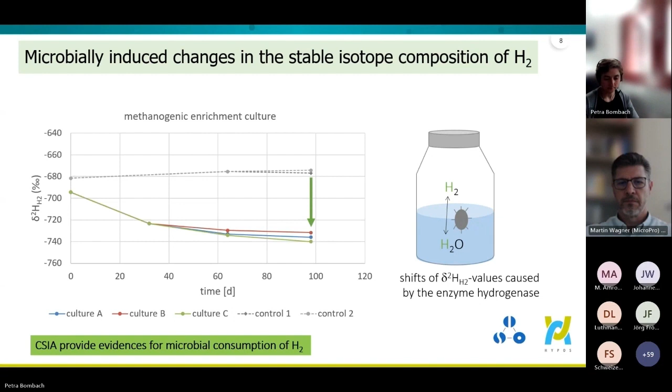So according to the results, microbial processes can have an impact on underground hydrogen storage. Therefore, we recommend monitoring such processes during storage, and we developed a concept to monitor them in situ. We recommend regularly analyzing the gas composition to see if there are already changes. As I showed you, the stable isotope composition of hydrogen can provide evidence of microbial hydrogen consumption. This method was already applied at a field site where hydrogen was injected. Based on molecular analysis, you can see changes in the quantity and in the microbial community composition during underground hydrogen storage.

If there is evidence of microbial hydrogen consumption, stable isotope analysis of sulfate and methane can be performed to see if the hydrogen consumption is coupled to sulfate reduction or methanogenesis.

And Petra, there are 3 minutes left. Yes, thank you very much.

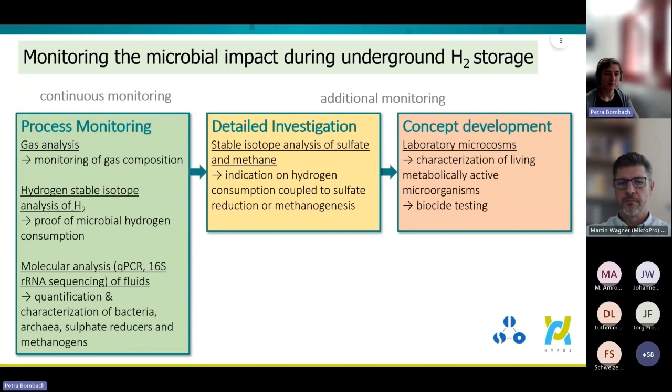In addition, biocides can be tested in laboratory microcosms, which Martin Wagner will explain afterwards. So this brings me to the end of my presentation.

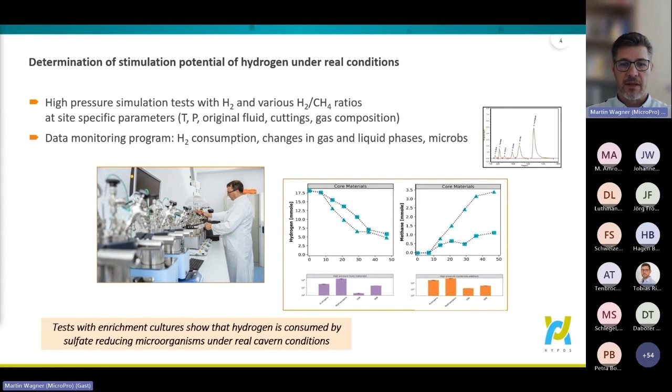Based on these data and information from the laboratory tests, we did a risk assessment to define the growth parameters which enable bacteria to grow and significantly degrade hydrogen under the reservoir conditions. This risk assessment was also combined with biocide tests. We have tested several biocides to determine the effective concentration to suppress microorganisms from growing.

So different types of biocides were tested, and we also tested different conditions which might be modified in the reservoir, for instance, pH, to suppress microbial activities. And all this information was included in the monitoring program and also in the recommendations for action to minimize the microbial activities in the reservoir.

Or here in this case in Caverns, yeah. Yeah, that's actually a brief overview of what we did in this project.

Let me just give you some short notes about our company. We were established in 1997, and we are a service provider for the industry and research partner for academic partners. We run microbiological, molecular biological analysis of samples from underground sites, reservoirs, storages, caverns, everything which is related to the underground, and also for above ground installations for industry